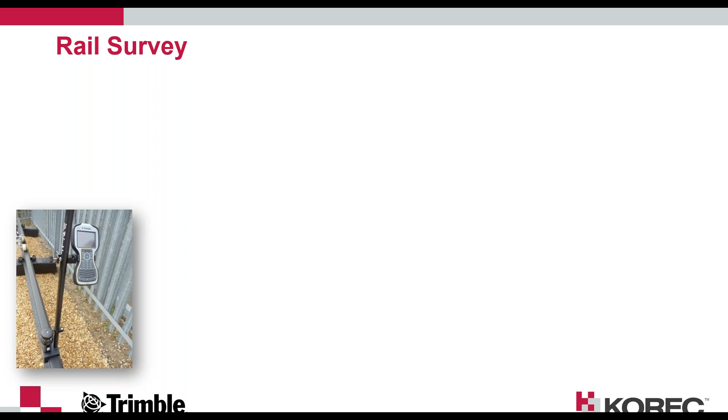We're familiar with the conventional rail survey - total station on a tripod, measuring to a target on a rail shoe. That allows us to measure the running edge of the rail and the track geometry. We can move on from that and start using a Gedo track measuring device. This has sensors on board to measure the cant and gauge, so when we place a prism on there, we can generate the rail geometry much more quickly than using a rail shoe, and also much more precisely because the sensors account for the track geometry as we're measuring.

We can also add additional sensors to that track measuring device, in this case a 3D laser scanner, and from there we can start to get much more rich information - point cloud data, as well as track geometry information.

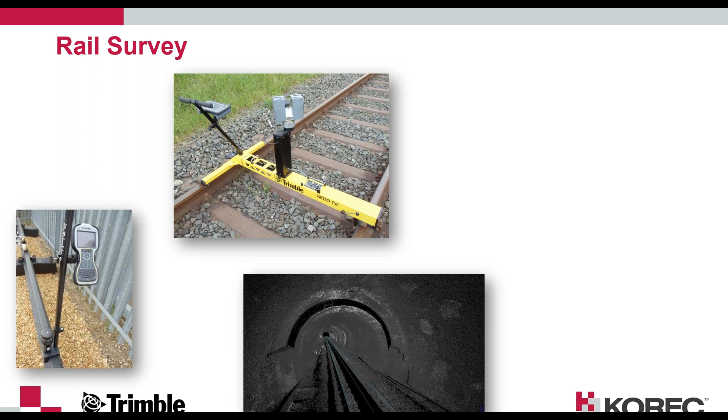This is really key when we're looking to maximize our time on site. If we think about taking profiles of tunnels or structures, capturing point cloud data allows us to view the whole of the site in very high accurate detail, cut cross sections wherever we like, take measurements wherever we like, and capture that data much more efficiently than we would do with manual measurements.

Once we've got that data, we can run various algorithms within the software, and that's what I'm going to touch on a little bit later in this presentation. We'll do a live demo through some different data sets to show you examples of what we can do.

As you can see, there are real tangible benefits to having point cloud data. This is on Network Rail's media center, where they've been able to use 3D point cloud data to check clearance, to introduce new rolling stock much more efficiently than would have perhaps been possible in the past.

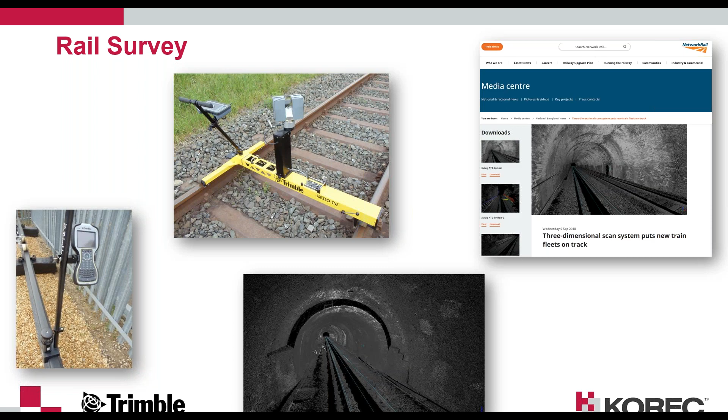The first update I'd like to talk to you about sits around the Gedo track measuring device. Very proud to have been associated with the Gedo for a number of years now. In fact, it's the 10th year this year in 2019 that we first started working with the Trimble GEDO, and it gained Network Rail approval, as Gedo 1.

The Gedo 2 came along towards the end of 2012, beginning 2013, and that's the device you can see on the screen there. The idea with the Gedo 2 is to make it as flexible as possible, so we can add different sensors to the same chassis to help maximize your investment in the equipment. We can also change the gauge adapter so that the Gedo can be used on gauges from 1 meter upwards very, very easily, just with the introduction of the gauge adapter.

We also do a bespoke Gedo, which is available for narrow gauge track, and if required, Trimble are very flexible in terms of modifying the system. So for things like embedded track, or if you're looking to set out slab track, for example, we can modify the Gedo to meet your particular requirements.

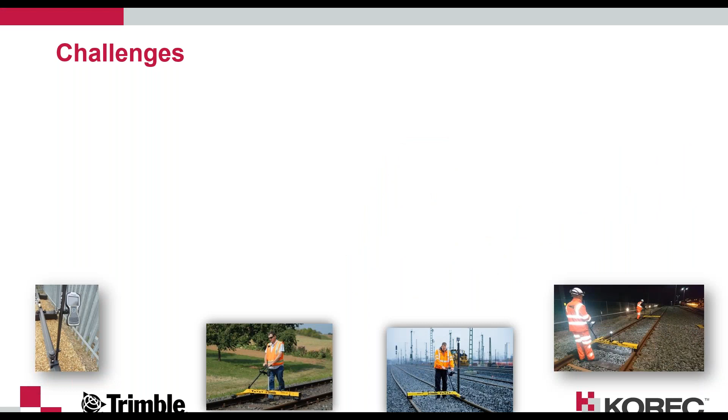But even so, we do face some challenges using conventional survey techniques out in the field. First of all, we have to factor in time to set the total station up. Obviously, we want to be on site for as little time as possible. We don't have much track access time, so we need to capture as much as we can, as quickly as we can, and setting up and orientating a total station, particularly on a tripod, can take some time.

We can move that on a bit with the twin system that you can see at the bottom right-hand side of the screen. The setup time to the instrument is significantly reduced, but we still face challenges on some sites even with a system like that.

Line of sight can be a potential issue if we've got people in between track measuring devices, or if they're getting in the way of a total station set up on a tripod. Refraction and environmental conditions play a part as well. If the ballast is very hot, it traps and retains heat, and then you'll get heat shimmer, which means you need to reduce your observation distances between the instrument and the prism. That's something to bear in mind, particularly through the summer months.

Then we need to think about track access and the number of protection staff involved. Working at night, obviously more and more people would prefer to work during the day, but there are occasions when we have to work at night to gain the access that we need. Reference control points are needed along the track, and sometimes those control points get demolished as well. For the engineering teams coming up behind the surveyors, trying to tie into existing control can very often be a challenge.

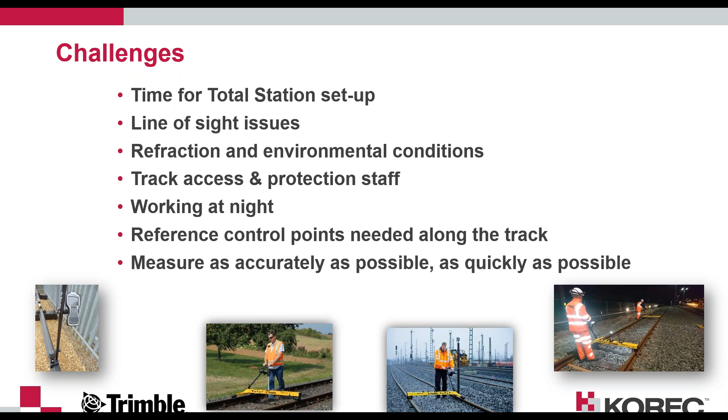And as I mentioned before, we need to measure as accurately as we can and as quickly as we can.

So one way that we can improve those conditions is by using the Gedo IMU. IMU stands for Inertial Measurement Unit, and we add that yellow box there that you can see onto the side of the Trimble GEDO 2 track measuring device.

Inside, it has a series of very high precision gyros and accelerometers, and it acquires the data at very high rates. Effectively, the system will initialize when you first turn it on. It's then working out its position and its orientation. Then when you start pushing the track measuring device along, the system will track its 3D trajectory and effectively allow you to do away with a total station.

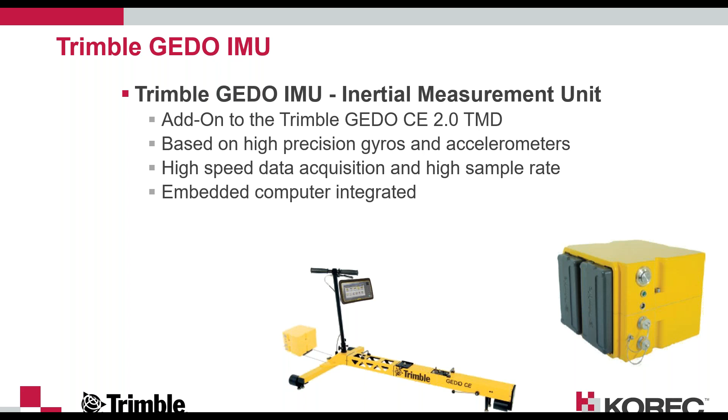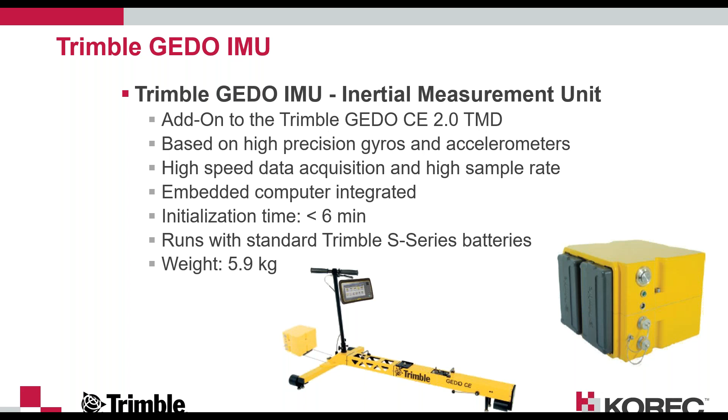There's a PC embedded in there as well. The initialization time is very fast, taking less than 6 minutes for the system to compensate and initialize. It runs with standard S-series batteries, shown on the image on the right. Those batteries power the total station, the Gedo itself, and the IMU, so it's just one battery system to consider. And it's very lightweight, the IMU itself weighs less than 6 kilograms.

When we're out in the field, IMUs over time have the propensity to drift, so we need to correct for any drift in the trajectory as we go. The system here also has a profiler on it. This section is a laser tape on an angle encoder, so we can measure offsets to points as we go along the track.

We start off in the field by parking the Gedo opposite a reference point. The profiler has a visible laser spot, so we can measure that reference point very accurately. Then we proceed along the track, and as we come to more reference points, we just measure those as we go by.

We can also, while traveling, measure other information with the profiler. So if we've got a topographic point that needs capturing, like a fence line, a datum plate, or the position of a lockbox, we can measure topo points as we go, and we could also use those as reference points in the future.

If we were going out on site and had some control missing, we could add to that existing control as we pass. That's very helpful for the construction guys coming along behind the survey team. Then when we get to the end of our survey area, we take our final end reference point, save the file, and that's job done. So that's using the profiler to capture track geometry in the field.

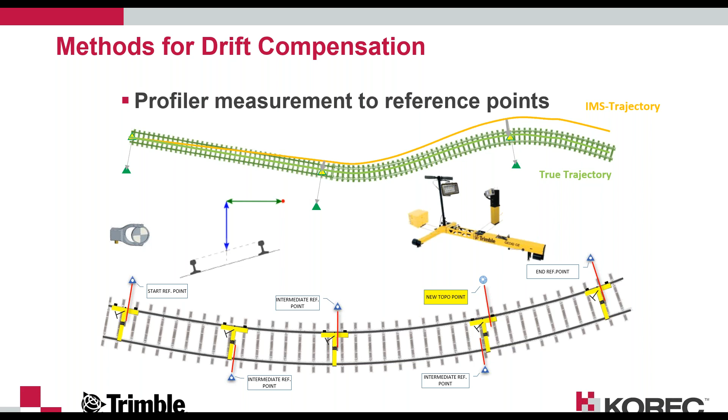The next thing we can do is combine GNSS technology with the profiler. If we're in an area with no physical control points and want to tie into a GPS grid, we can use either a VRS-based system with real-time corrections from Ordnance Survey base stations, or a local site coordinate system with a GPS base station, using the Gedo as a rover.

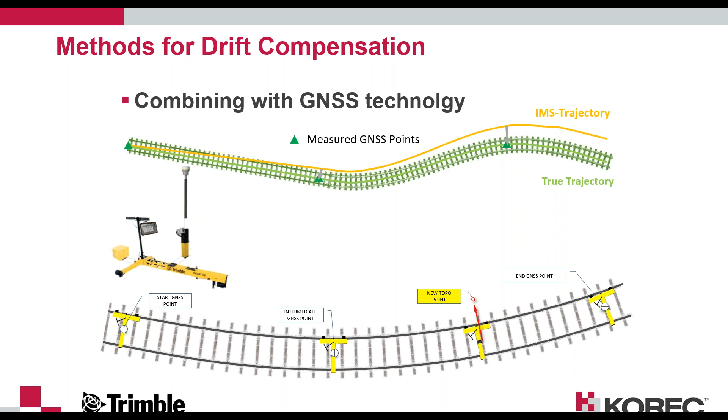In that situation, we would start the system off by taking a GNSS position, and then as we move down the track, we can take intermediate GNSS positions. Because we have the profiler on board, we can also measure topo points or add control points in if we wish. Then, once we've finished our run, we can end the survey, store the data, and away we go.

We can also add a scanner to the system, and this is where it becomes much more productive. Here, we don't need to stop the Gedo and take any measurements, we just walk along the track and measure the targets. You can see some of the targets on the left-hand side, with a bubble, a 5/8 thread, and a point, so we can use this as an ordinary detail pole target.

We also have targets that can be mounted on OLE gantries as we pass, and reflective stickers that can be attached to walls and similar surfaces. As you push the Gedo system along with the IMU and the scanner running, you'll pass the targets, allowing all the information to be synchronized and processed in the office via Gedo Scan Office software and Gedo Office software.

So benefits of the IMS, first of all, high productivity. Depending how fit you are, you might get up to 5,000 meters an hour, but realistically, a good steady walking pace without having to stop or set up an instrument allows significantly greater productivity than you'll get with conventional instrument-based systems.

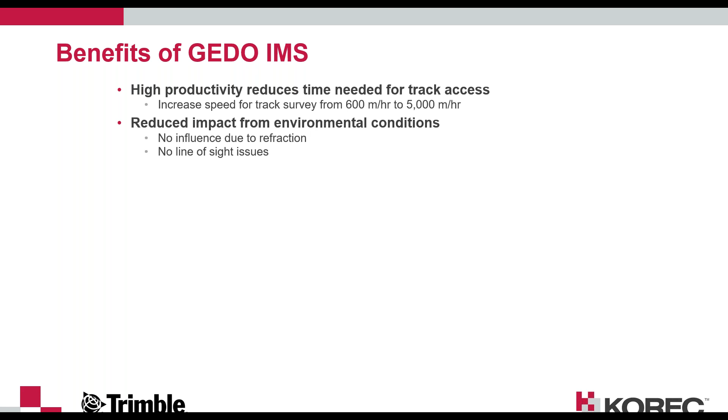No impact, or reduced impact rather, due to the environmental conditions, particularly with refraction, which is our biggest issue, and also no line of sight problems either. Very high density of points along the track. The IMS system is running at 200 Hertz, so we get a lot of data.

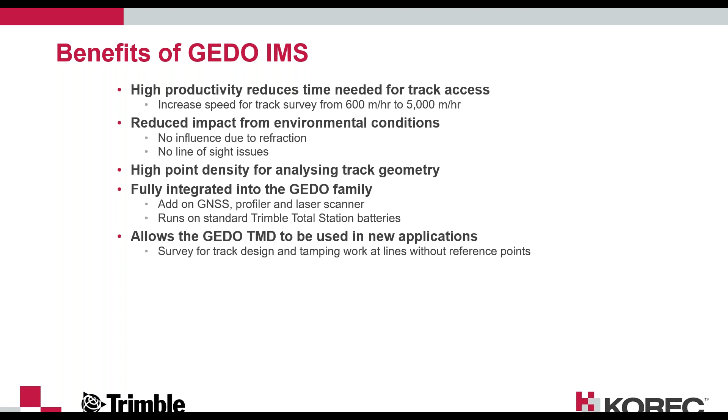Fully integrated into the GEDO family as well, so we can add on the GNSS profiler and laser scanner to the system as well. Allows the Gedo to be used in new applications, particularly if you're in areas where there's very sparse control or no control at all. You can at least get some work done.

And improve safety, very key for us. So only one person is required to operate the system, although depending on the accessories added onto the Gedo, you might want to have a second person in attendance to remove it from track. Lightweight and fast to initialize, so you can begin work very quickly with this system.

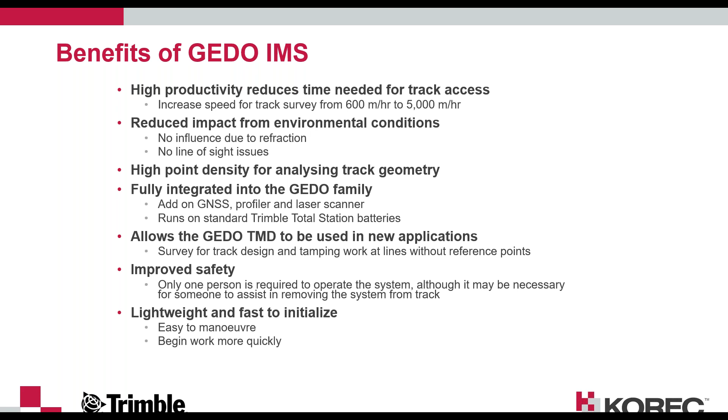Like I say, initialize within 6 minutes and you're ready to go. So the kit basically consists of a new Gedo TMD, which is IMU ready. It is slightly different to the original Gedo chassis. All been network rail approved now though, so the full Trimble solution is network rail approved.

The Gedo IMU, of course, tablet computer, because we need higher processing power to run the data. We also support the new T10 tablet, which you can see on the right there, and the new TSC7 controller, both of which are Windows based. The TSC7 is a really nice controller, very powerful, very high quality screen, and backlit keyboard as well, which is particularly important for us

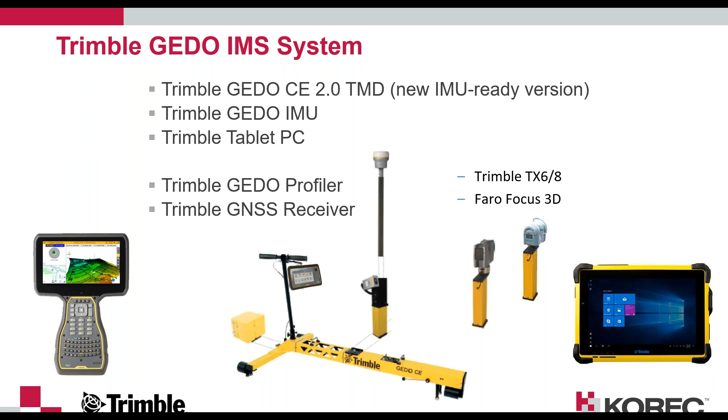working at night. And then we also get updates to the field and office software. So the field software, nice and easy to use, that goes on our TSC7, T10 or tablet controller, and then we get a new module for Gedo Office to process the IMU data.

I will just quickly touch on rail monitoring. There's a number of people now looking at scanning for a way of monitoring tunnels, but also within the Gedo Office software, we do have a monitoring module, which allows us to be able to compare different survey runs on the track and generate reports. That's actually part of the Gedo quality module and is available in the latest versions of Gedo Office software.

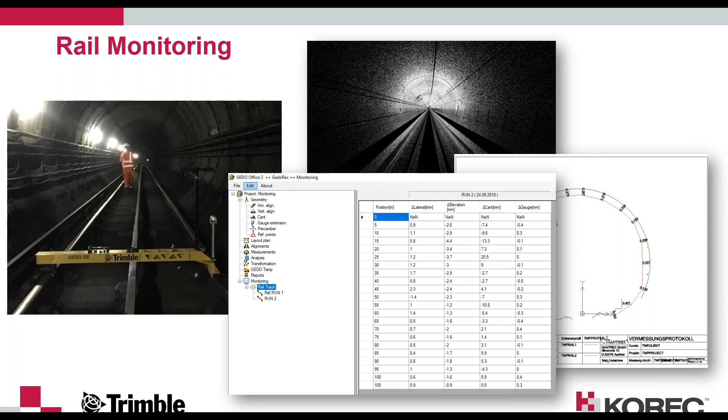Moving on with the scanning point of view, I also wanted to touch on the Trimble MX9. This has been around for just under a year now. We've had our system up and running for around 9-10 months, and we've been able to access it for use on the track as well. So I'd like to share some of that data with you and some of the processes involved.

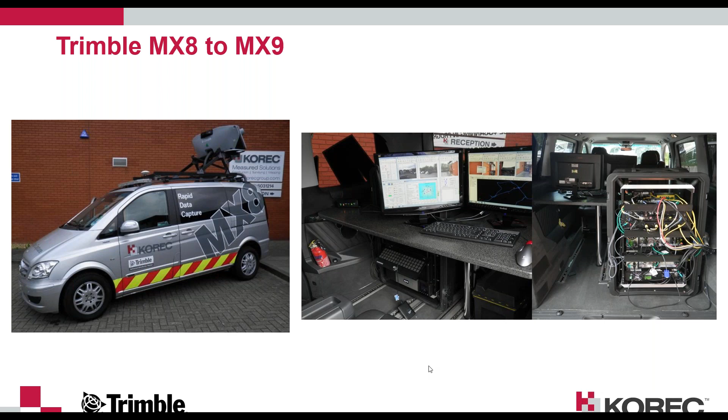Enter the MX9, and you can see it's a completely different scenario now. So we've got it on a roof rack system, and then to drive it, we can operate the MX9 through a tablet or laptop.

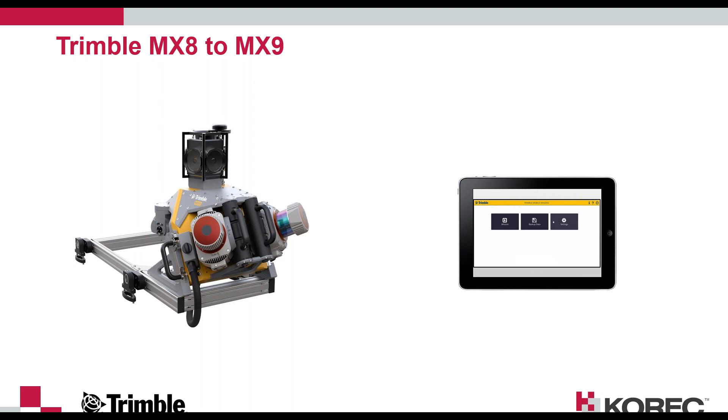Basically, the MX9 consists of the device itself. So we've got two high-speed laser scanners measuring 2 million points a second. We've got a high-end IMU GNSS system on board to give high-quality positional data, very best on the market. We've also got a series of cameras as well. So we've got the spherical camera at the top there, forward-looking and rear-down cameras as well.

We have a roof rack system, which allows us to mount the MX9 onto the roof rack extremely quickly, just clicks into place and locks. And the roof rack can be easily mounted to a wide variety of vehicles. We have the power unit that runs the device through that umbilical cord that you can see come out of the MX9 there.

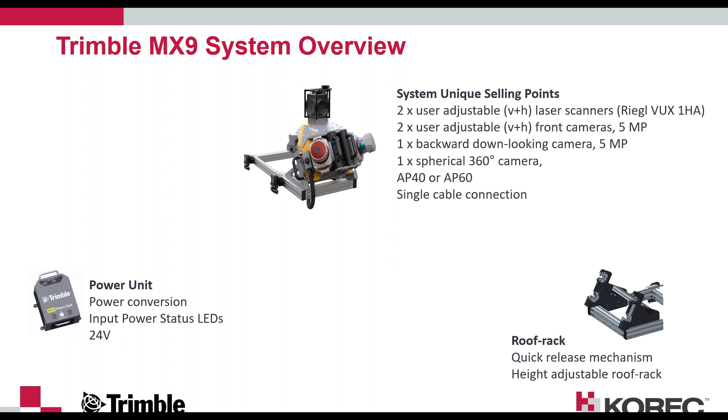And we have the control unit, so that's where all the data is stored. That's where we have removable solid state drives as well, and that gives us the connectivity then through to the control unit, which, as I say, is really flexible. Tablet, laptop, absolutely no problem to run the system. And then finally, we can add some accessories which will help in difficult environments, particularly tunnels. We have a GAMS antenna and distance measurement indicator, which can also be put onto the vehicle.

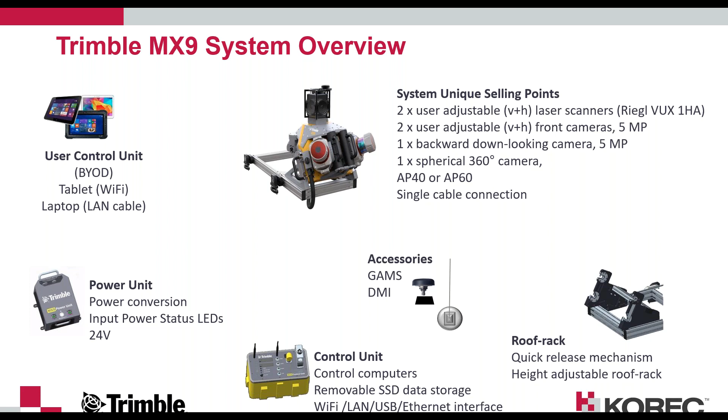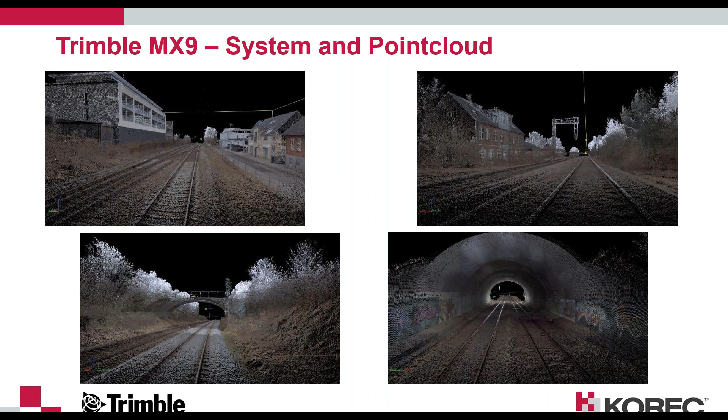You can see examples of the point cloud there. These are colorized from the data. We can have just intensity values, but in this case the team have chosen to color the point cloud just to help people understand a little bit more easily.

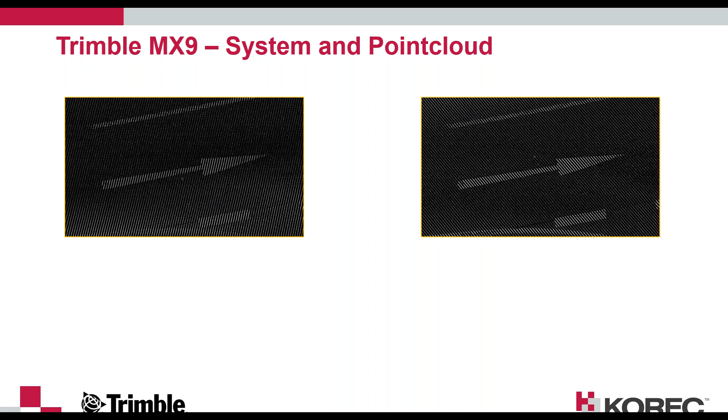Part of the benefit of the system is the ability to mount or adjust the twin scanning heads. We can run the lasers at different speeds, but we can also adjust their position, and that gives us what we call high fidelity data. So this is the scan from the left laser, this is the scan from the right laser, and this is the combination of the two. You can see you get much more highly defined information, and some really nice straight line striping there as well, very close together.

So a very, very good quality point cloud, which enables smart algorithms in software to do a lot of automated processing. That's really what we want, because we're going to drive the data quickly and want to get out and extract the information we need quickly as well. The better the data quality, the easier it is for smart algorithms to help us get that data out quickly.

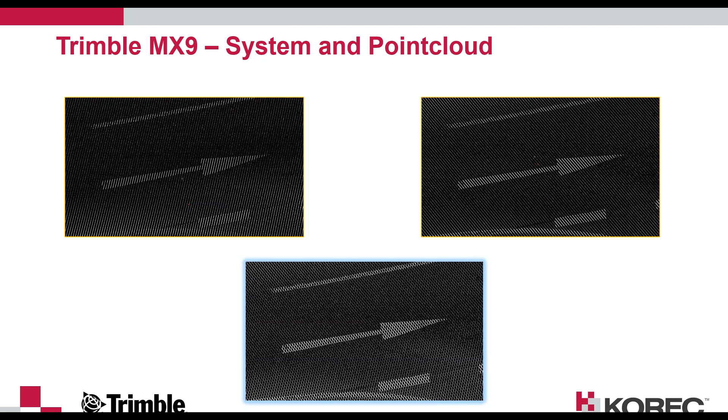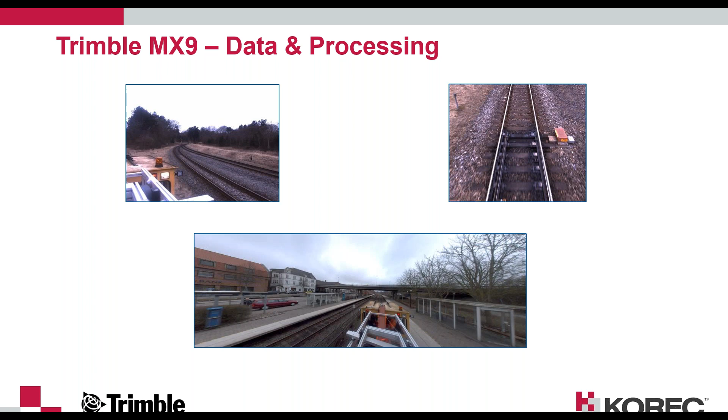We've also got the imagery, as I mentioned. So you've got the 360 spherical camera, and you've also got forward-looking and rear-down cameras as well. Then we can start processing the data using a combination of the point cloud and the imagery, and start extracting asset information as well as digitizing data.

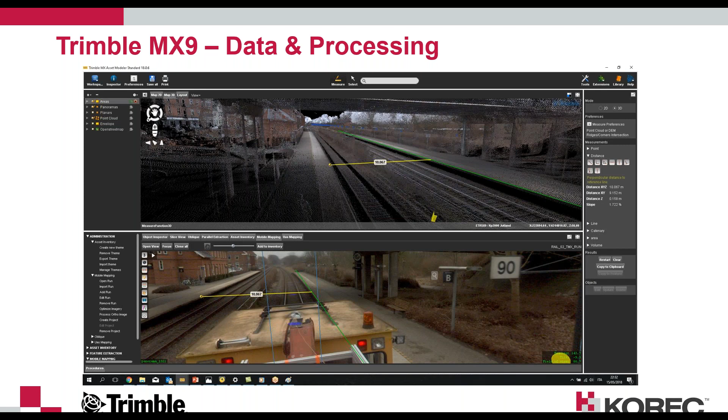Very intuitive software that we run from Trimble, easy to get to grips with, and very, very productive as well. So you really are, with this system, taking the field into the office, and you can capture data from it at your leisure.

So the workflow would be: collect the data with your tablet device in the field, process that information through Trimble's POSPAC software to get your trajectories, and then we want to model and analyze that data. So we can go into Trimble Business Center, which is our survey and engineering package. All our data can be brought into Trimble Business Center, from digital level and traversing right through to MX9 data.

SX10 mobile scanning data - it can all be managed through Trimble Business Center. And then if we're looking for asset extraction, GIS mapping type applications, then the Trimble MX software is perfect to get data in the format required for those markets. And of course, GEDO Scan Office can also accept data from the MX9.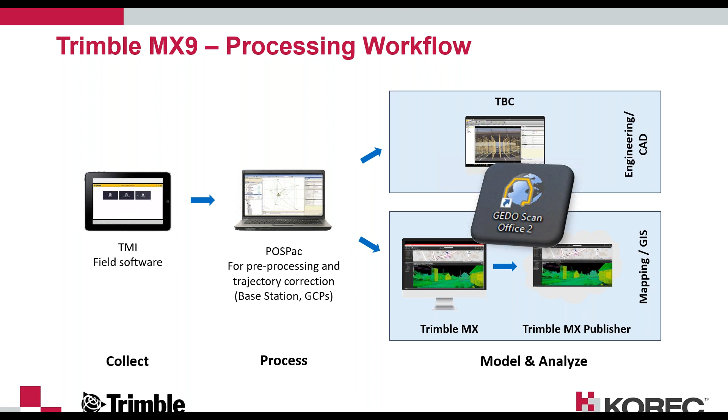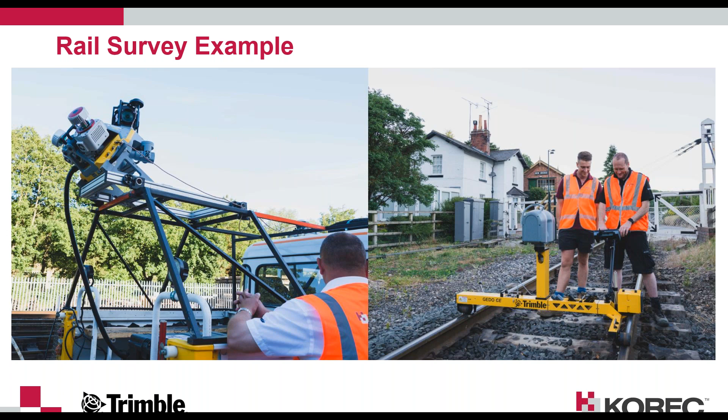And to that end, we went out and did our rail survey. So this is the MX9 mounted on the Land Rover, ready to go. We also had the Gedo IMS scan system available as well there to go out and capture the same data, because we want to compare the two measuring systems.

And to give you an idea, that's what the elevation difference is between the two. So you can see the Gedo at track level there with the TX8 laser scanner on board, and then you can see the MX9 mounted quite a bit higher up.

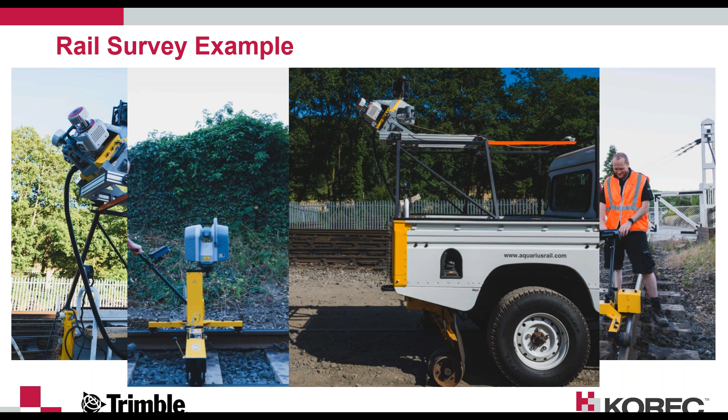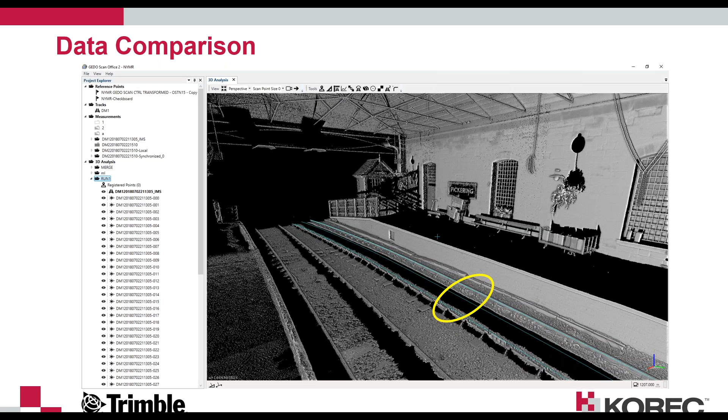Compare that with the MX9, and you do get a much richer point cloud because of the height on that particular system. Actually, I was very surprised by the minimal shadowing. You're just missing areas under the lip of the platform there, which is unsurprising due to the height of the scanners. But a really high quality point cloud data, and comparisons between the two systems were really, really good.

We also compared them to platform gauging as well, and had results typically 20 millimeters better.

So with that in mind, we talked about productivity. Boots off ballast is a requirement for the industry. Survey once and use many times.

Just to compare the various systems, this was a conventional scan we did a couple of years ago, where we set up conventional instruments, measured a single bore, single track tunnel, and that took around 4 hours with 5 instrument setups and a couple of people.

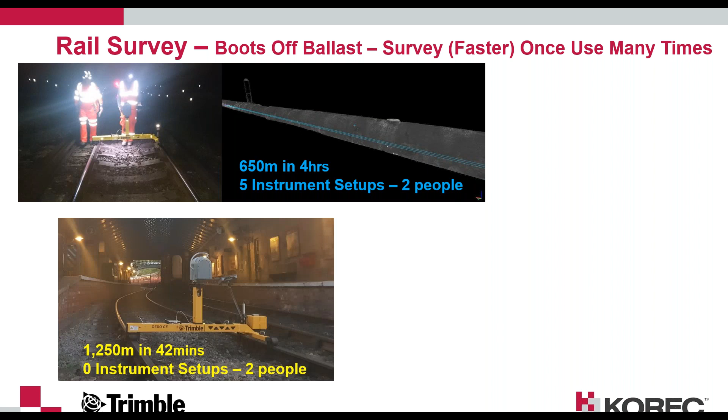Contrast that with the IMS on this particular project, 1,250 meters in 42 minutes. Again, we did have 2 people there to assist in lifting the kit off, so 1 operator and another person to help lift the system off track if required. But you can see a huge increase in productivity using the IMS.

And unsurprisingly, using the MX9, basically as fast as you can drive, we can operate up to 110 kilometers an hour, I believe, with the MX9, and still achieve very high quality point cloud data.

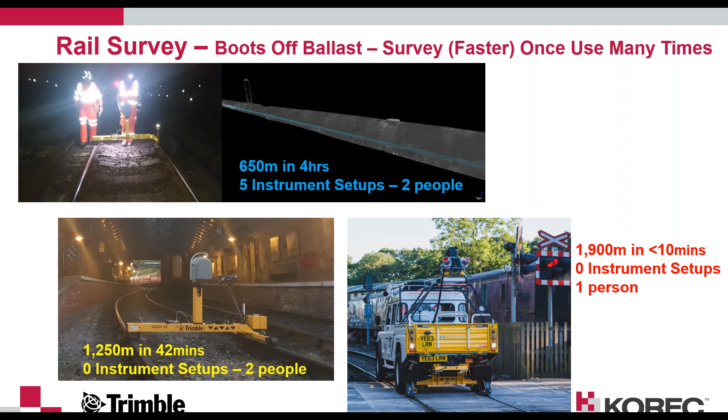But what are we capturing this data for? And how do we share this data around? A platform that we have within the Trimble family is Trimble Connect. This is an online system which allows us to share data between the field and the office, but it also allows us to share project information with different disciplines. So we have the surveying side, the construction side, buildings, BIM, MEP, etc. One Trimble Connect project can contain multiple layers of information.

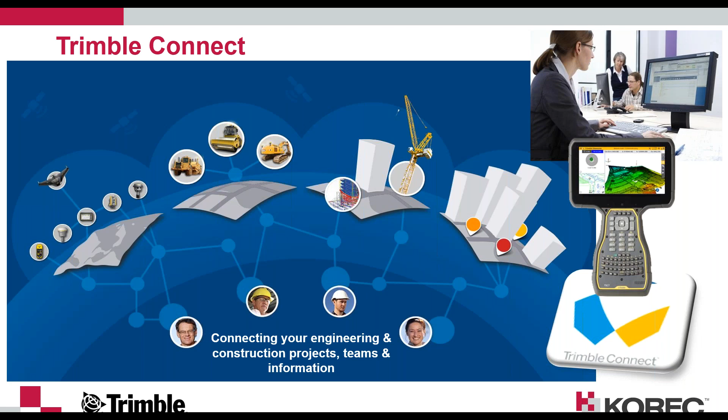To give you an idea of what Connect looks like, I can run a live demo on it if we have enough time this morning. But just to give you some screenshots, once you log into your Trimble Connect account, which is free to set up, I encourage you to speak to your local reps or go online, search out Trimble Connect and set yourselves up with an account.

If you're Trimble users, you'll be able to do that, and you'll be able to synchronize your data, create your projects, and push that data from the controller to the software via the cloud immediately. So this is my particular account.

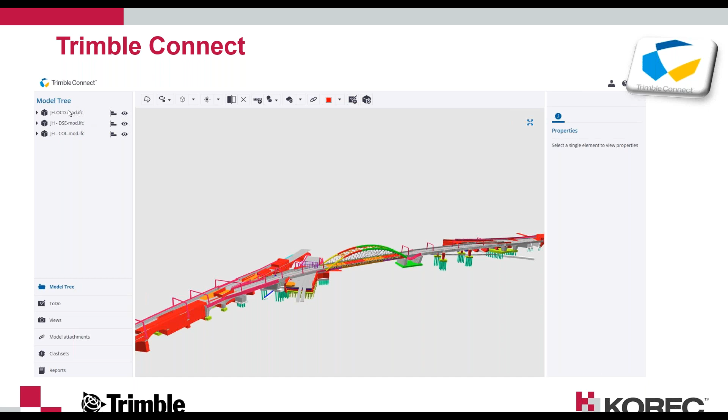I've got a couple of projects in there at the moment. If I click on one particular project, for example, I can see the BIM model associated with it. This is data from Trimble's Tekla business, but we could also have BIM models in here from Autodesk or from Bentley Systems. And the data is layered here, so we can see the different layers, and we can visualize those different layers by clicking on the eye.

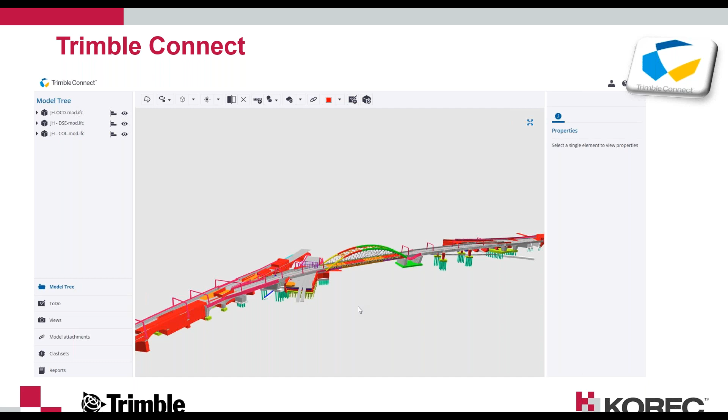And then we also have the ability to create different views, add to-do lists, check clashes, and even make measurements and add text and information within that particular project, so that anybody also invited to share data around that project can see what our concerns or what our comments might be.

Another way of viewing the data, which we're really excited about, is using the Microsoft HoloLens to do so. This is the HoloLens actually in operation, so this is what the user sees when they're looking through the lens. The first thing the HoloLens does is map its environment, so you'll see some grids appear in a moment.

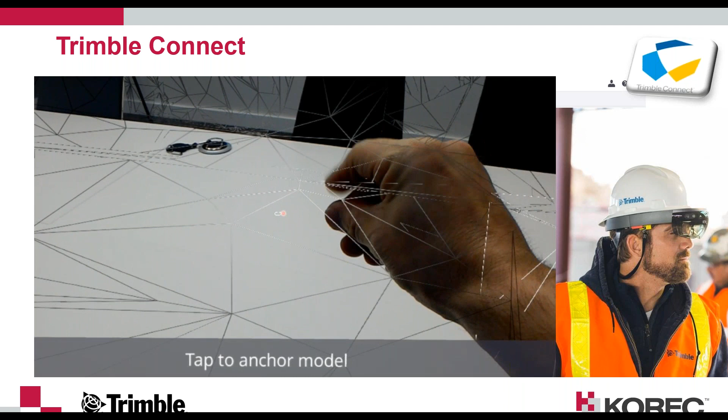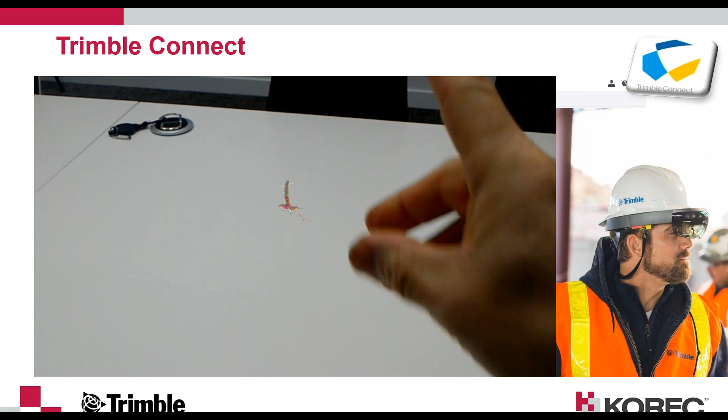So we've opened that particular project and we want to view that 3D model. We're now just in a boardroom environment and we're connected to the internet. So one person can actually see this and operate on it, but if we have multiple users in the room with headsets on, they could all see exactly the same thing and all have input around what was going on.

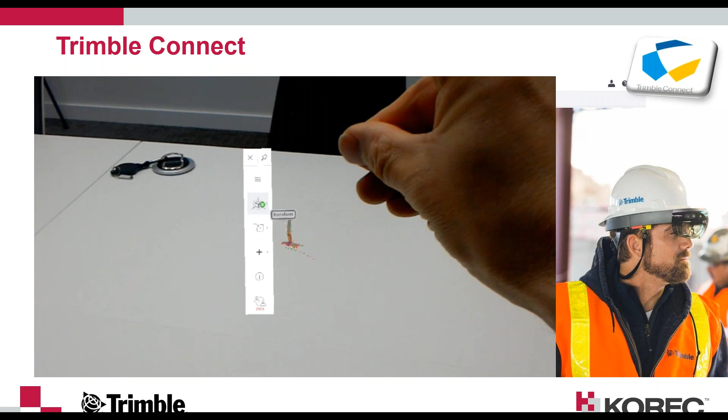So the user is going to scale the system, pin it to the desk and scale it. And indeed, if users were in different offices, as long as they had internet connection, they should be able to also view and work on data.

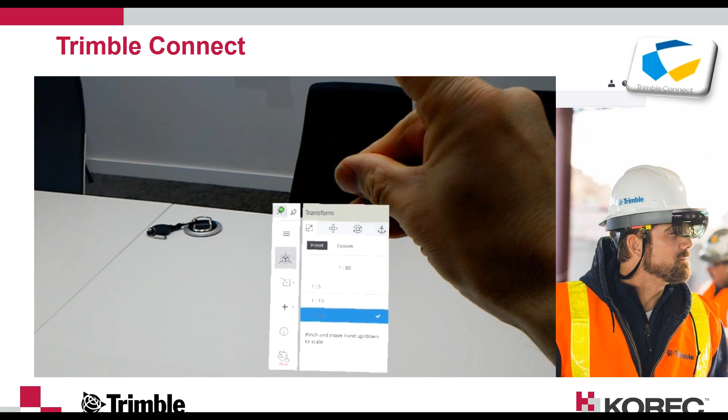So we'll see this model come in now and then get scaled and moved around the room. And of course, we have the same control over this through the HoloLens as we would do in Trimble Connect. So we can turn on and off different layers, we can move to different areas, we can measure things if we wish.

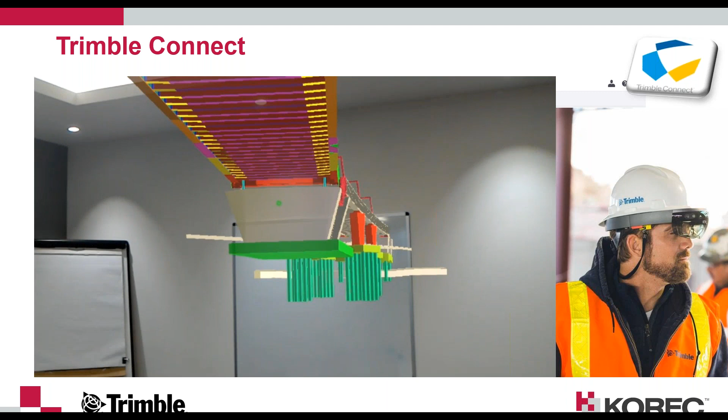Dimensions of bridges, we could look at the rebar in the structure, all that information can be viewed and shared really easily with the team, either in the room or potentially remotely.

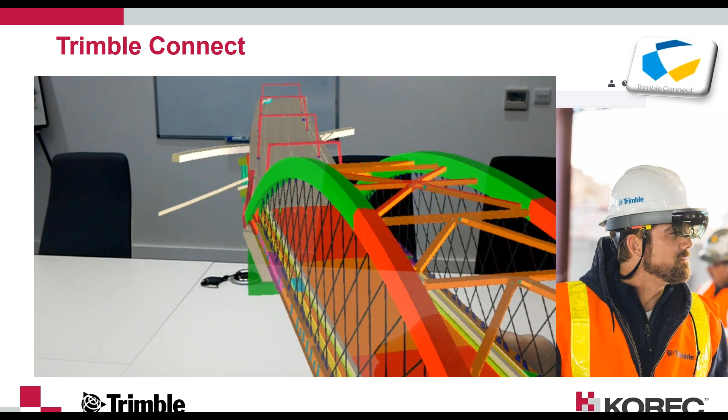So that's an overview of how Trimble Connect works and how the HoloLens works. I'm conscious of time, so I'd like to just talk to you now about some of the smart algorithms that are available in GEDO Scan Office.

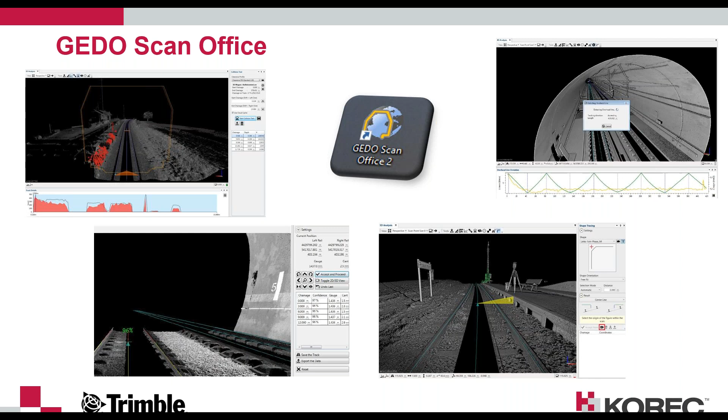Thank you for your attention so far. Hopefully your warm beverage is still warm, and we can just run through now some data sets with GEDO Scan Office to share some of the new functionality with you.

Okay, so this is the GEDO Scan Office software. When it opens up, we have our recent files, or we can just create or open a project. GEDO Office allows us to do all the processing of the scan data.

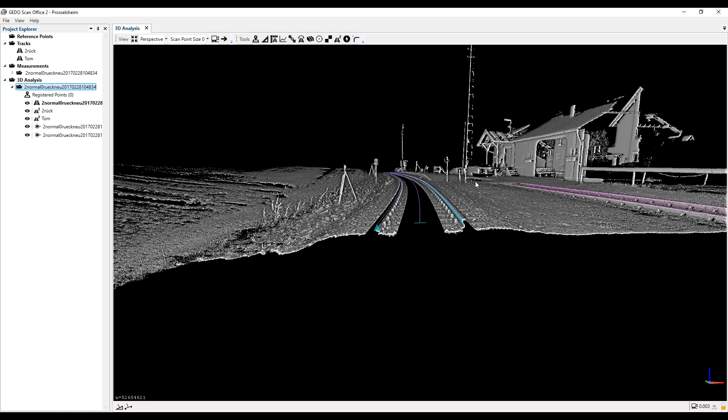So if I open up this particular project, you can see here up in the left-hand side, this is our project tree. This shows us the different tracks that we have, it shows us the laser scan measurements that we have, and it also shows us what we call our 3D analysis, which combines the tracks that have been measured and the different laser scans pertinent to the project. So at the moment we're hinged to the track.

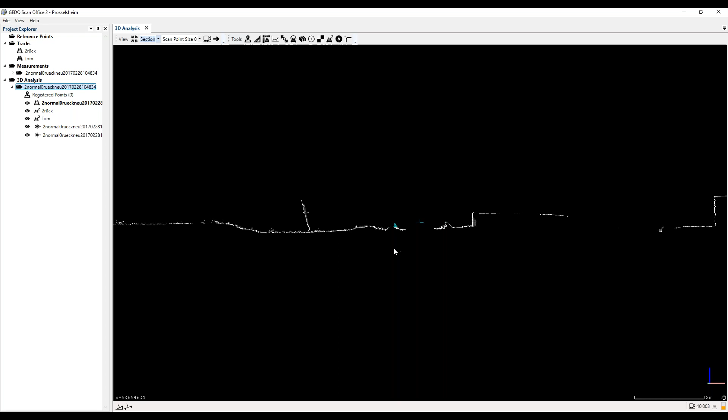We've got our tools at the top here, so we can change our different views. We're toggled to the track at the moment, but we can go into free zoom mode if we wished. We can also look at the track in section mode as well, so as we wheel through, we can see the cross sections growing there if we wish. We'll just run it in perspective for now. At the bottom here, we can see our current chainage as well.

So what I'd like to show you in this particular data set is the shape tracing tool, which is the one just here. So if we come down the track a little way and have a look at the platform edge here, I can choose the shape tracing tool.

That then allows me up here, we work through these step by step. So I can choose whether I want to project a left profile or a right profile. I can just mirror that, and that's in the direction of positive travel, so back to low mileage. I can choose the different shapes, so we can create the shapes either manually or we can import DXF shapes. We can choose the selection mode, so automatic, and what distance we want the points to be generated.

So what I do now is if I click on the platform edge, it says confidence here of 99.8%, so I can just now accept that point. Now it's going to advance a meter. You can see here that the coordinates of that point have been created along with its chainage.

So I can just accept the next point, and the next point, and the next point. And as we go along the platform edge here, you can see this blue line being created, and we've actually got these coordinates now, so I can carry on digitizing from the cloud. We can see here that we're at a very high confidence limit still, and we're actually generating this red point here, generating the platform edge, the hidden point.

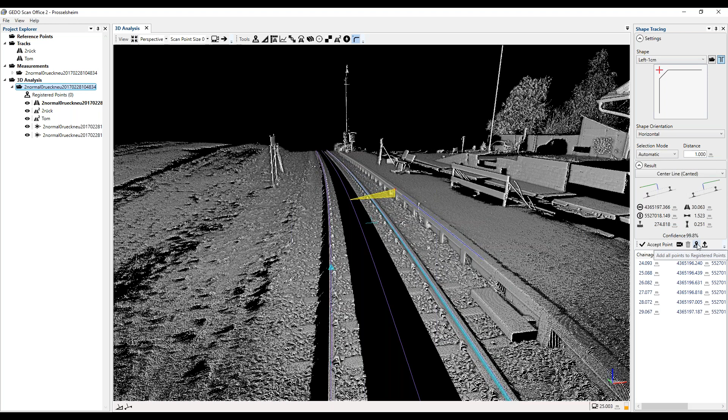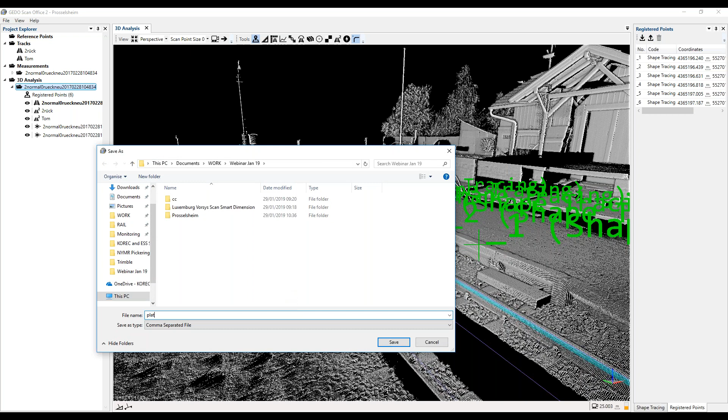Once we've captured the data, we can then add them all to the registered points. So if I click on that, those points now sit inside that project, and they're up here under registered points. I could also, if I wish, choose export. So if I click on that, I can export all the measurements, click OK, and go to a comma separated file. So I could say platform, click save, and that's a CSV file of all those coordinates simply exported there.

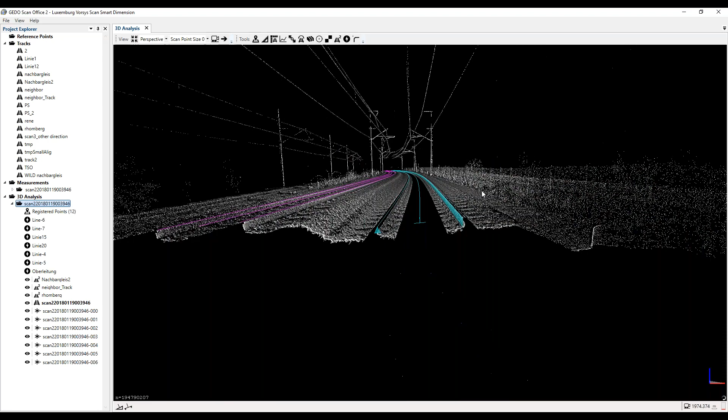If I now go and have a look at another project, we open up the Luxembourg project here. This particular project has got some overhead line electrification in it. So if we click onto the scan analysis here, again you can see we're hinged to the track, this blue line, and you can see the overhead electrification there. So as we wheel ourselves along the track, we can have a look at the infrastructure there.

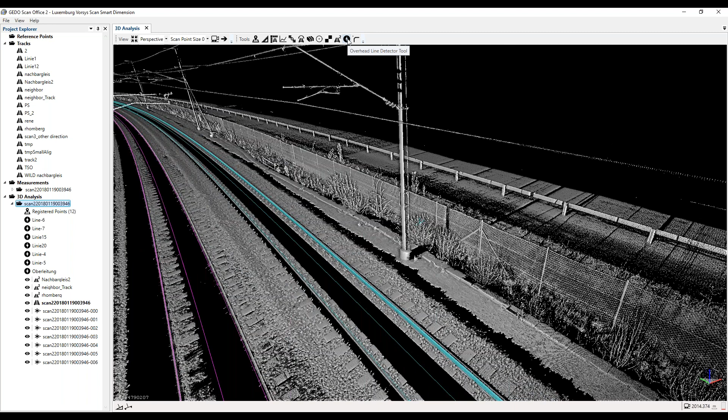We can inspect it and zoom in and so forth. So if we choose the overhead line detector tool, which is a feature that was introduced recently, it allows us to pick on the wire that we want to generate. So if I click on that particular wire there, you can see now it's starting to detect that line automatically, and you can see here it's generating the wire and also generating the position of the catenary poles as well. So we get the mast position as well as the OLE position.

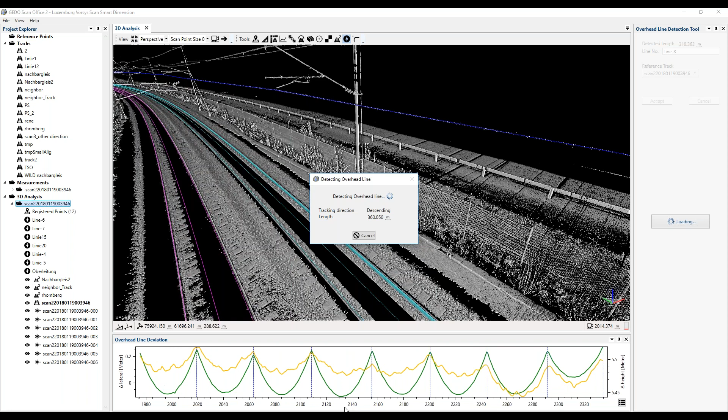So if we now just pan around, this blue line is now a solid line, so I can wander along it here.

You can see how well that's been detected. It's following that point cloud really, really well. And if we just turn around here and head back up the track, you can see it's gone the whole way along the line. You can see the dropper arms there in the background as we move past, and as we spin around there, that's all been captured.

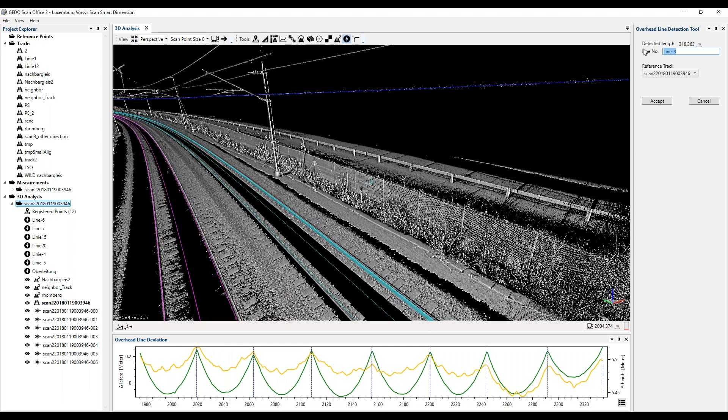So I can now choose what line number I want to call it. So I'm going to call this line ML01. I can choose which reference track I want to pair it with, and then click on accept. That line has now been generated, and I can close the tool.

And now if I click onto ML01 as the overhead line here, I can see the chainage, I can see where the OLE is, I can see where the catenary poles are, and here I can see the heights and staggers. So I can see the point number, the code, the stagger, the height, and the chainage.

Now I can add particular intervals if I want to as well. So I've got my start and end chainage of that particular wire. If I wanted to generate a point every 5 meters, I could simply click on add interval. That now has generated every 5 meters along the track, as well as at the catenary poles themselves.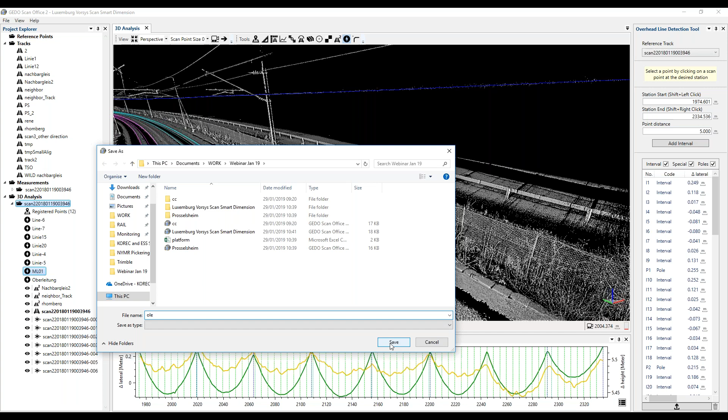And just like in the previous example, I can choose export, and I can say OLE, and that allows me to generate a CSV file with the overhead line electrification on it.

If I now go and have a little look at that, just going to have a little look at the OLE. And if we come up here, we can see there the chainage, the lateral distance, the height, and the pole and the point type.

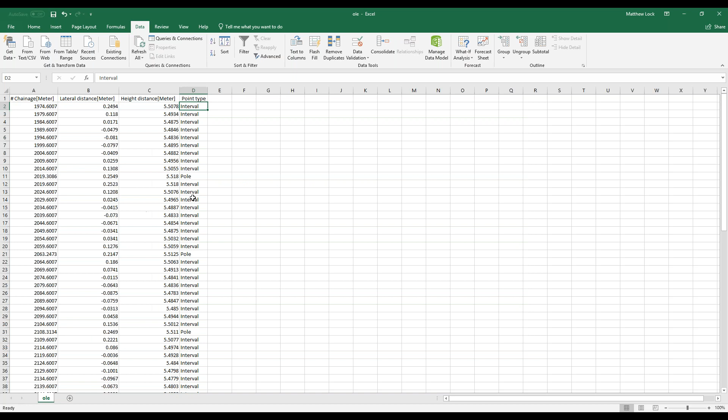So whether it's an interval or the pole, we can see all that information here. And actually, while we're looking at that, we could go and look at the platform, open up that CSV file, same again.

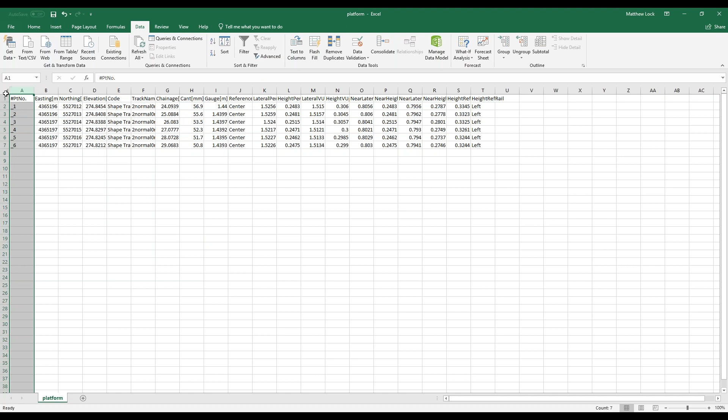And this is the platform information. So again, we've got our easting, northing, elevation, got the code, so we can see that we've traced it from the shape, track name, we've got the chainage, cant, gauge, and then all these reference distances here to those points as well.

Okay, so that's our OLE detector tool. If I close this particular project now, then we'll open the final project, and I'll show you our track detector tool and how that works.

So if we click on the analysis here, it will show us the scan. You can see our tunnel here. This is around 1,800 meters of tunnel that we scanned. So the track detector tool up here, number 2, if I click on that, allows me to generate the 6-foot road here from the main route.

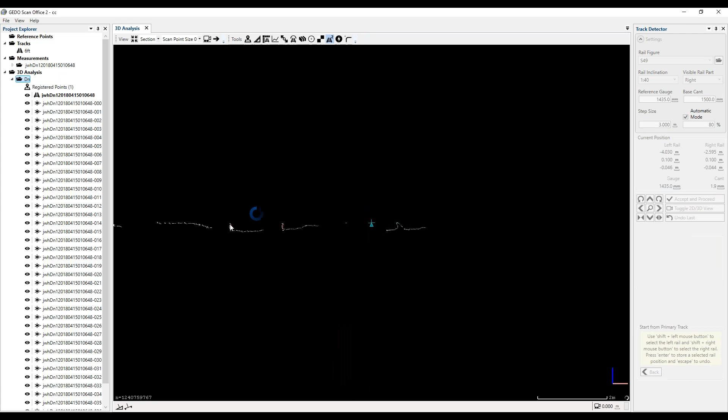So if I choose start from primary track, all I need to do is shift and left click on the rail in the point cloud. That will analyze that and give me a percentage confidence. So you can see we're at 97% there.

So if I zoom in, we can see how well we fitted that shape. So you can see the point cloud here. In fact, if we go and choose the correct track, we should find it's even better than that—so we're up at 99% now. So we've chosen UIC 60 rail, 99% confidence. You can see how well that's fitted to the point cloud there.

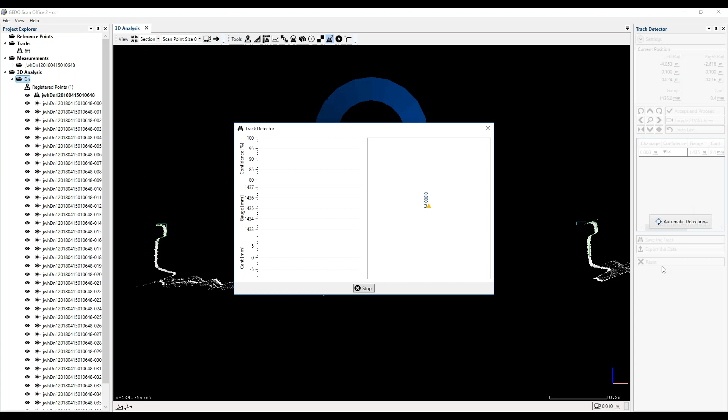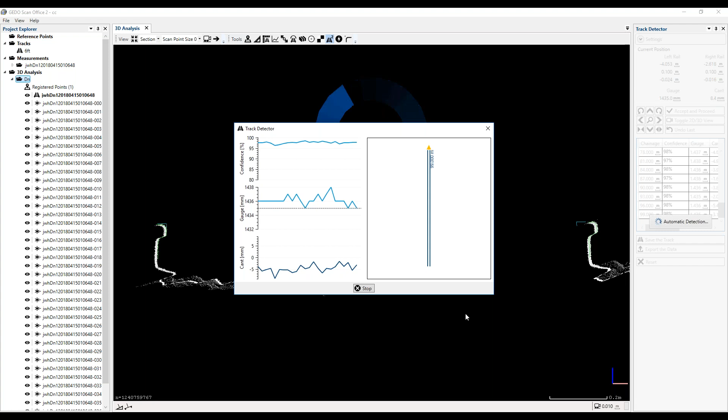And now all I do is choose accept and proceed. So the system now, if we look on here, we'll see the percentage confidence, and the system will just keep going, generating track for us. So you can see it's generated 40 odd meters, 50 meters already. So you can see the confidence that we're running at here, very high, the gauge that we've got, and also the cant as well. So we've generated 100 meters of track already, all automatically.

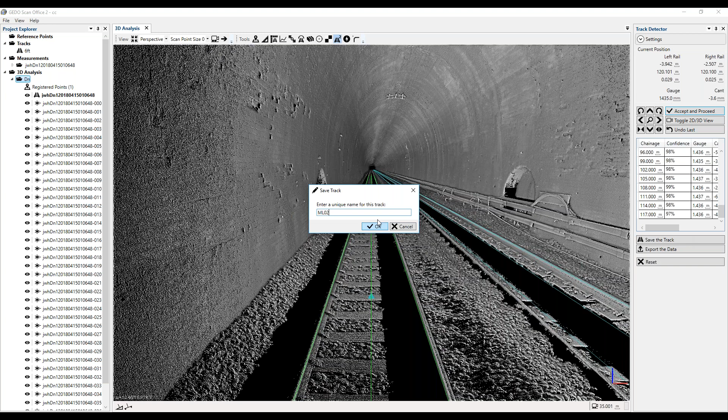I'll just click stop now. And then if I go back to the perspective view, you can see we're now actually on that generated track. So if I choose save the track, I'll save that there. That track has now been saved up here, and that will allow us then to jump to that track if we want to.

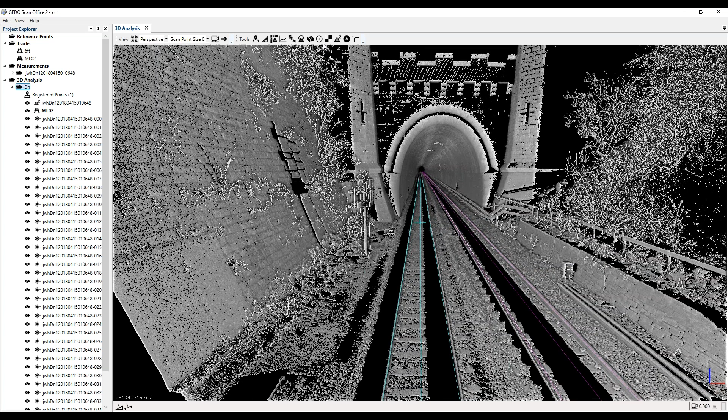So we could now run clearance through here. We could take dimensions from here, and you can see how simple that was to generate that track alignment. And then finally, we can look at our collision test. Now this is where we choose the train profile.

We can actually use a 3D wagon if we want to and load its dynamic profile. So with a 3D wagon, we can enter information around the wagon length, wheelbase, end throw, that kind of thing. And you can see on the screen now the profile of that train has appeared.

TfL uses this for checking their clearance. So if I go into section view, we can actually run the train down the whole track, and it will colorize the cloud with everything that particular train profile touches.

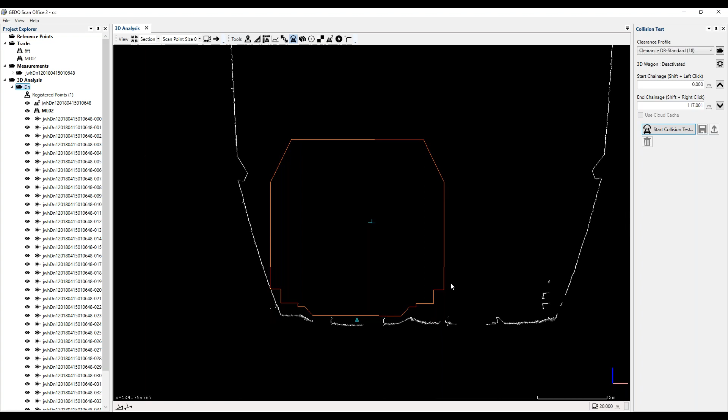But if we wheel through the track here, you can see now as soon as we're in the tunnel, we're going through at 5 meter intervals. I could actually change those intervals to every 1 meter. So as I mouse wheel along, I'm now going every 1 meter here. You can see that the train isn't going to fit down that particular tunnel.

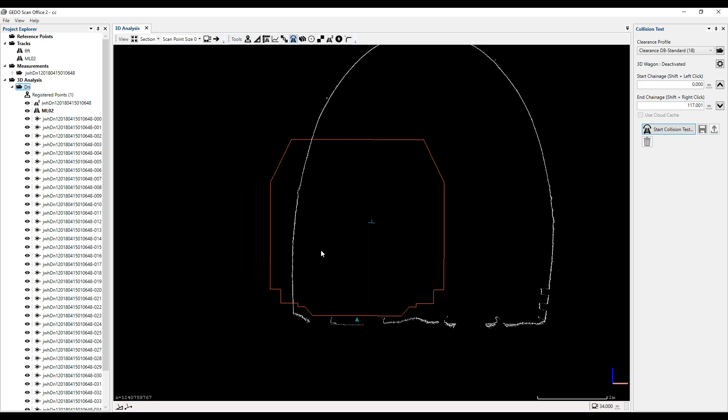So when we run this algorithm, it will actually push the train through the point cloud. It will colorize the point cloud based on the depth of collision. And it really does help the design team, the engineering team, understand what's going on with the track. As we saw early on in the presentation, Network Rail have used this to help put new rolling stock on the track and check for any issues.

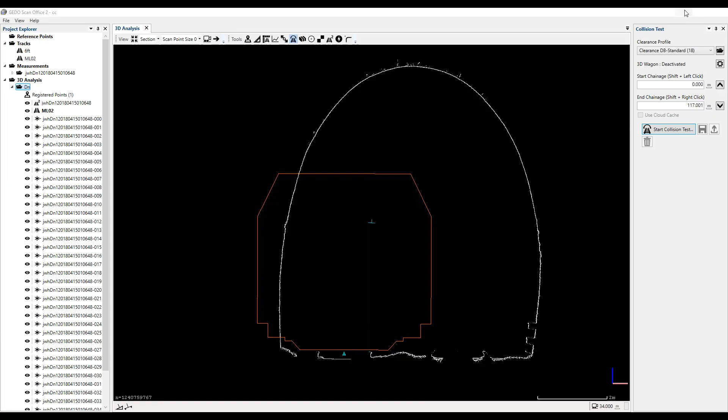So that's really where I wanted to get to. I think we're getting towards the end of time. What I will just do though is wait and see if we've got any questions. Just bear with me a second.

Okay, so we do have a couple of questions to go through. Can you upgrade an existing Gedo to IMS, and if so, how much is it? Well, you can, yeah, you can upgrade an existing Gedo. The very early ones, we just need to check the electronics in there. We do modify the electronics, we do modify the mounting and the brake system. So it would depend actually on the serial number, but I'll be pretty confident that we can upgrade most Gedo TMDs to the IMS system. The price would vary though, depending on what you wanted to add on in terms of accessories, if you wanted a scanner, that kind of thing.

How much does it cost to upgrade Gedo Office software? Again, it depends on the modules that you've got. It can be pretty inexpensive, and we also do different bundles of upgrade as well. So if somebody has perhaps Gedo Vorsys and also Gedo Tamp, we can look at bundle upgrades for that. And if people have got rec and track, we can look at different bundle upgrades for that as well. If you wanted to upgrade to the quality module, for example, that would be an additional purchase rather than an extended warranty.

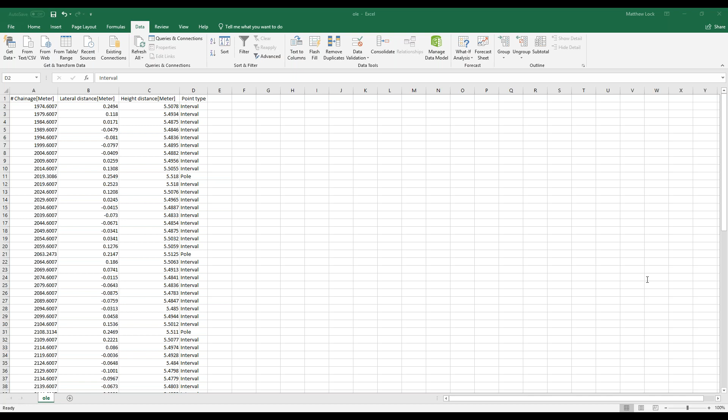How do you use the HoloLens with Trimble Connect? Well, the HoloLens would require a plugin to use Trimble Connect. That is a subscription actually to use it. Currently, well, again, it would depend on the number of HoloLenses you wanted to plug in and what sort of volume of data you were using, etc. But typically around £600 a year for the HoloLenses plug-in if you're just using one.

One more here. Is the system NR approved? Yes, it is. Yeah, I mentioned before the Gedo system, and also all our equipment, actually, total stations, control units, laser scanners, all network rail approved. We do have the approval certificate for that, so if anyone wants a copy, I'll be very happy to pass that on.